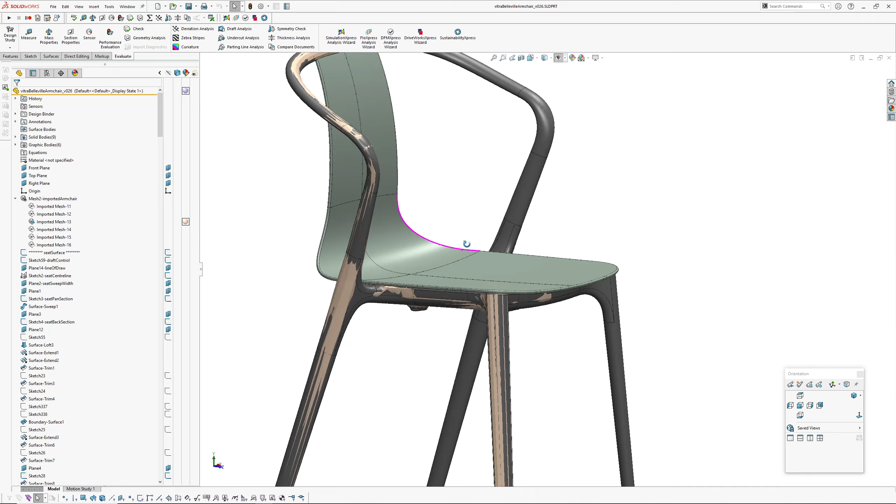As far as references for this, I only had two: one being the CAD model available on the Vitra site or one of their partner sites, which is fairly coarse, and the other reference is the Vitra website. This model looks a bit nicer than the one you can get a mesh for, but you can't download this one unfortunately, and you can't pivot right underneath. It's got some locks there, so this is quite handy for trying to look at the back here.

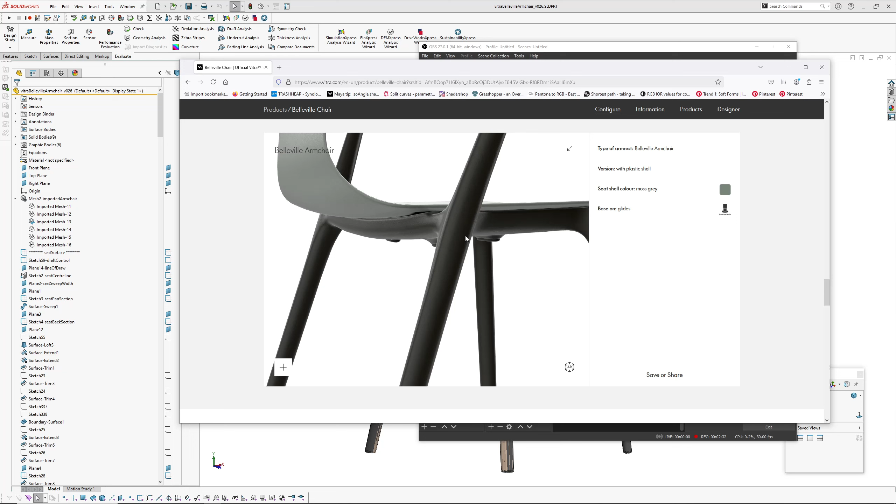So this is my best attempt at creating this chair. I'm going to do what I normally do with something a bit more advanced like this - if we have a look at the performance evaluation, so 427 features, I'll roll through the tree.

If I just show you the directory with the files, you can see here started 2021, then had another go in 2022, then 2023, and then I've really had a run on it since the beginning of this year. As I said, this area at the front where I was struggling, I'll explain that when I get to it.

I'm just going to roll back through the tree. I might take some fairly large jumps past stuff which is fairly like trims, or stuff that's not too critical. I'll upload the file too, like I normally do, so you can download this and pick it apart. Solidworks 2020, so it's a bit more accessible.

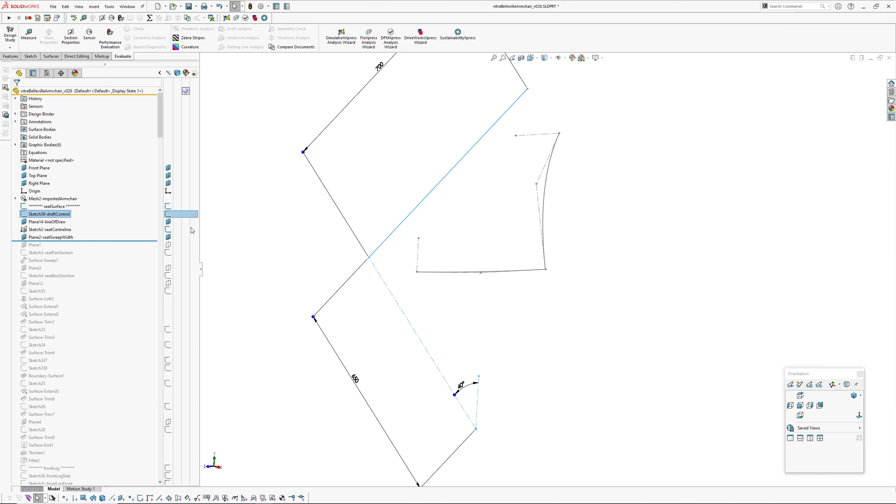First thing was I created this draft control, but I haven't really used much of that. So I'll just bring up the mesh. I trimmed the mesh in half in Rhino.

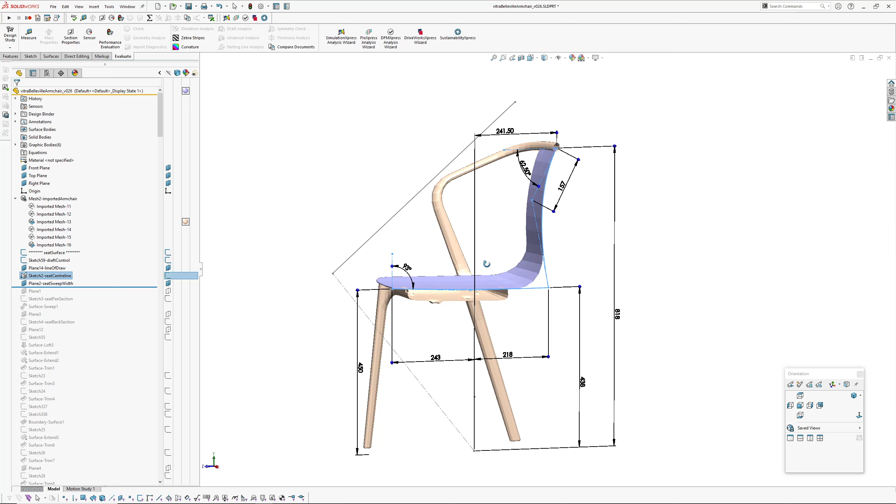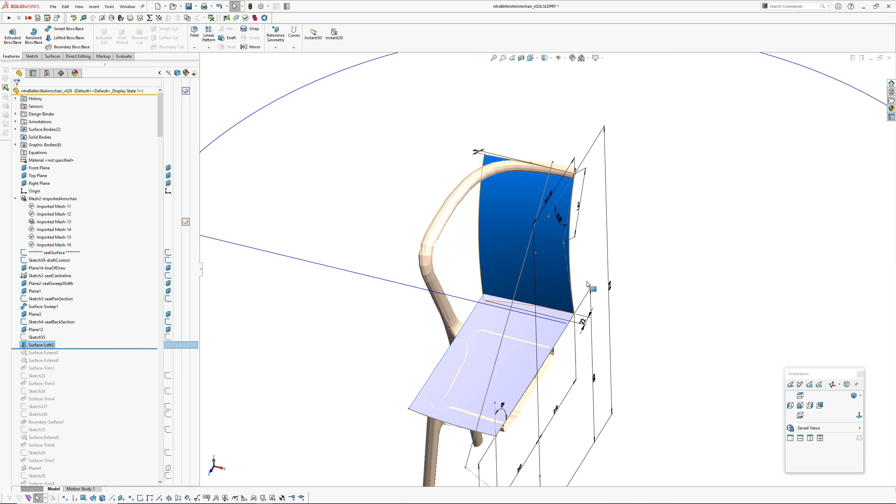I've started by creating the center lines, some sketch geometry, fairly simple degree 2 curves, and then created a sweep, which is that main seat surface on the underside of the seat pan, and then created a back section - the rear section there, this is the loft, because it changes section as it goes up - and then extended those out to intersect on this side and trimmed them back to square that end up.

And then I've proceeded to trim those surfaces back for where I want the bottom area, or the rear of the seat, to run through. And then I've created some curvature continuous degree 5 style splines through there, with 6 CVs, Bezier curves, curvature continuous to the references, and then created a boundary surface.

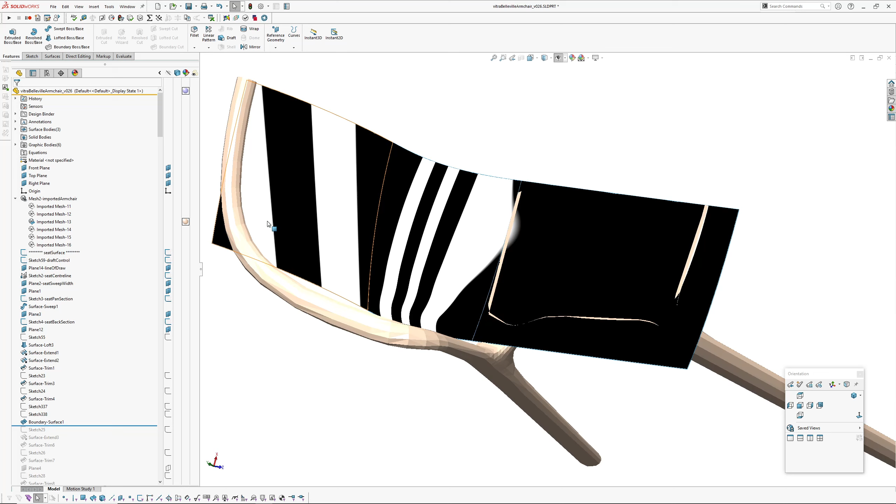So that's the main seat shell construction. It's a bit wobbly out here, but I'm not worried about that because this gets trimmed back. I've overbuilt this surface up here and this one because I'm going to come in and trim this back. That's the back trim, and last of all is trimming through the blend that blends the back and the seat together. I've only made a tangent blend there - I could have made that curvature continuous, but I haven't.

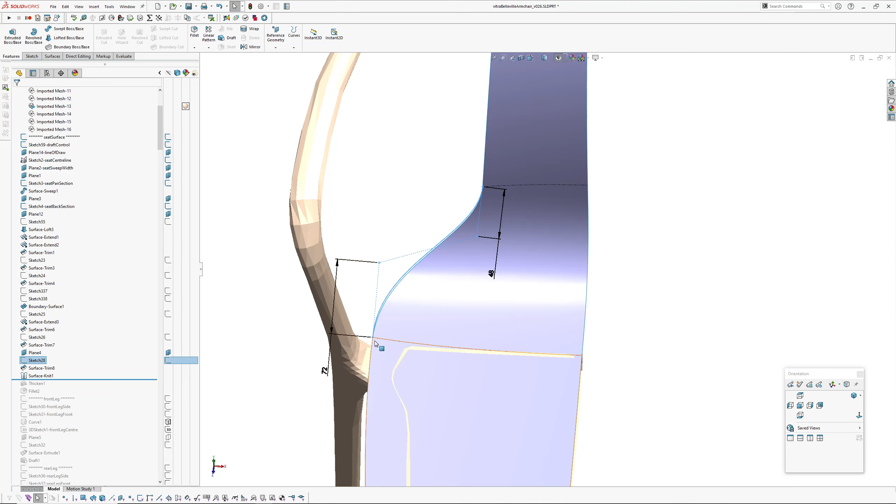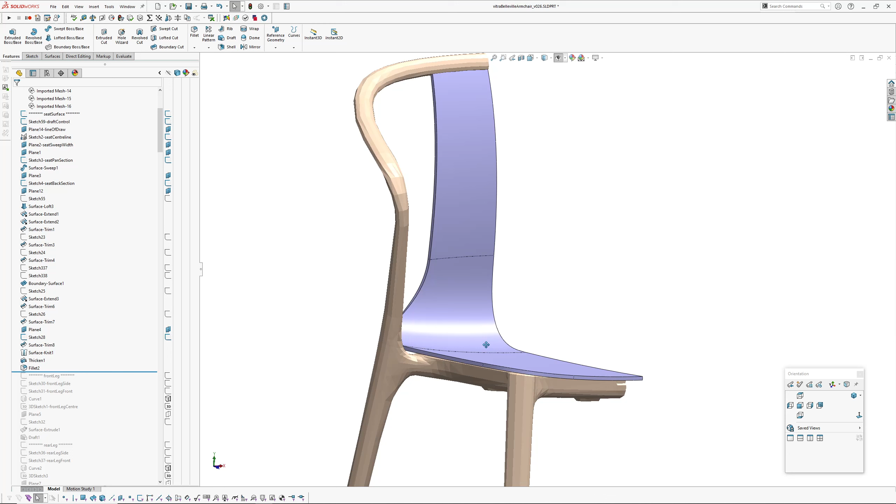So anyway, approximated the form from the mesh, and then I thickened that a nominal amount. Sorry, it keeps hiding - okay, thickened that out, and then put a big fillet on the front. That was easier - overbuilding this and trimming it back rather than explicitly defining this boundary and building surfaces, because otherwise the UV flow on the surface would be narrower here. So instead it's just more open and easier to do, easier to get a nice result.

Next up is the front leg. So with a chair like this, I work the base forms. Any chair I've worked on, actually, the way to try and do it is to get everything in place first, like your base geometry, because that's the stuff that drives the blends, etc.

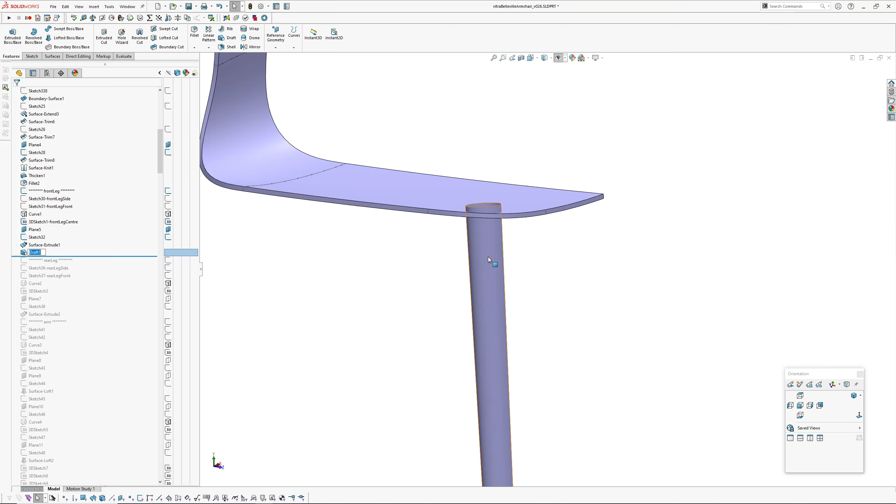If you're designing for manufacture, that allows you to build the base geometry to suit your draft angles, etc. So this leg is an elliptical form, extruded upwards, and I've got some draft on it to give it the taper.

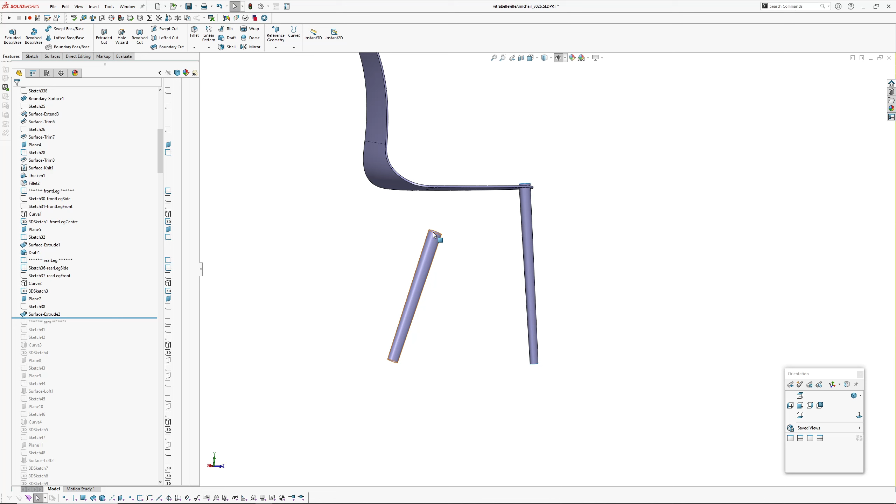It's got half a degree of draft as it runs up. And then the rear leg, I've only run it up to this area here because there's a big blend that goes on, so I just wanted to define that area. The rear leg is a 3D curve controlled with a couple of projections, which are projected onto each other to control the center line for that extrude onto the arm.

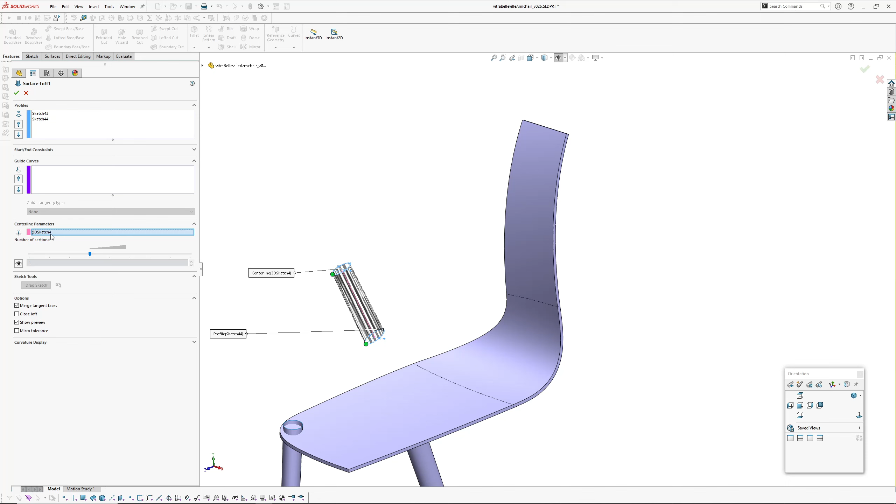3D sketch there. So if we have a look at this one, see if it's center line. It's a center line loft with one section on each end. And then this one up here, again a center line loft with a section on each end.

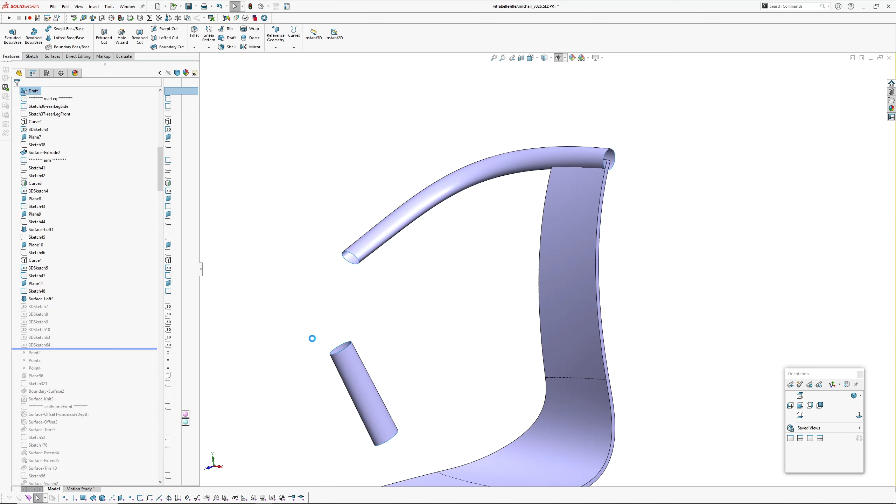So this is where it starts getting a bit trickier, because I had to define a whole pile of geometry here to control this form as it flows in space and rotates, so it didn't pinch, because it was pinching at one point in here. So those are a series of 3D sketches, and those are all dimensions.

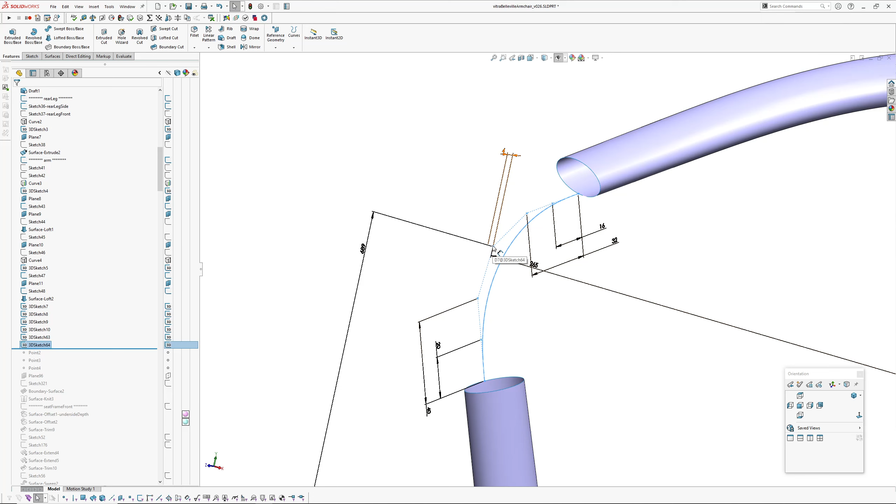Right, moving on, otherwise this video is going to be really long.

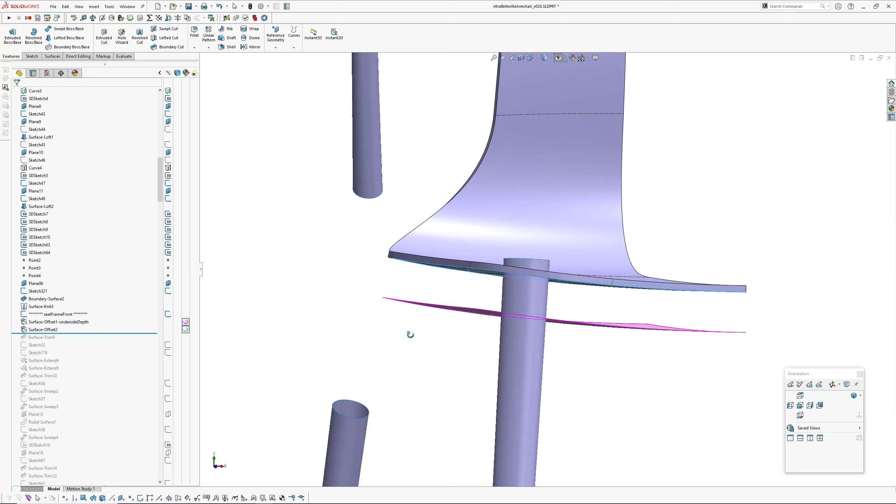Next thing to do was to start populating the seat frame on the underside. So I started building the seat frame front, with some offsets in here. This is the underside, which I decided was going to be an offset. I don't know if it is in reality, if it's an offset of the underside of the seat pan, but I decided to do that anyway. So that's 30.5 millimeters.

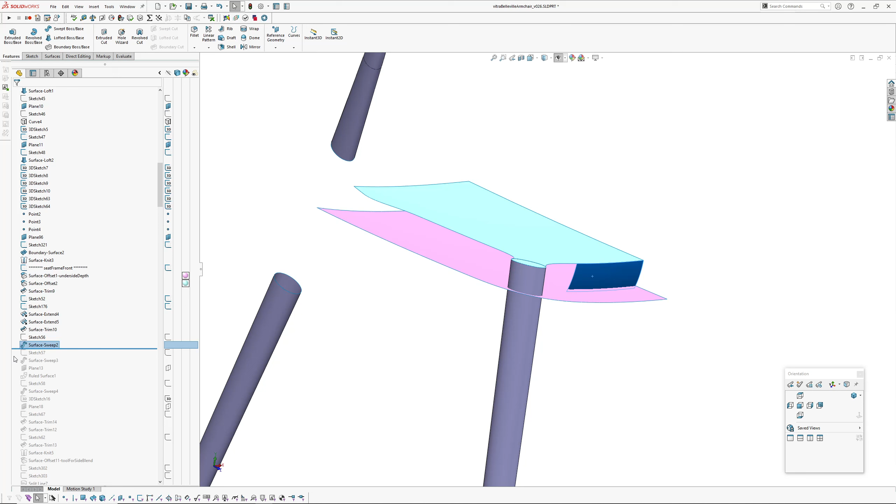And then just a few trims, and we start building, we'll hold the top there, start building the side walls of the under seat structure. Those are sweeps, and they're just intersecting, they're all arc sweeps, swept arcs.

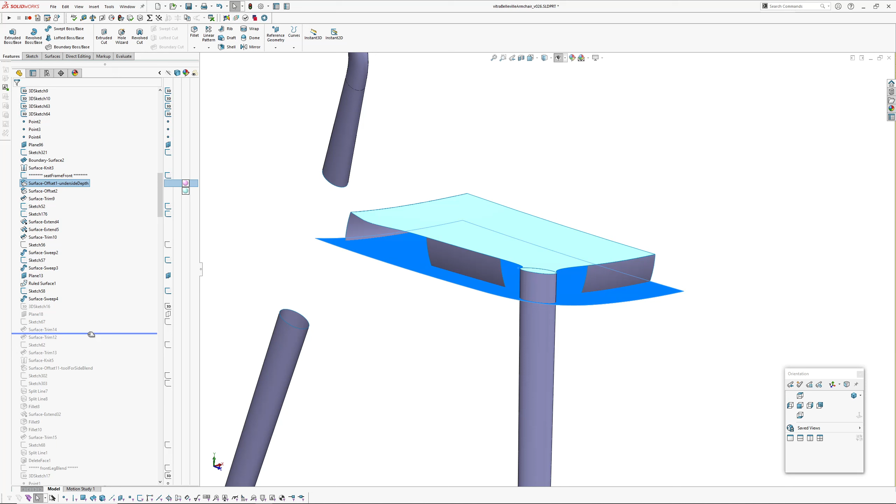And they all intersect through the underside surface, and I've trimmed those back. I've got a few things you might see if you're rolling through the model, like I've got a tool body, which is basically when I've had to copy a surface to extend out to build an overbuilt surface. So anywhere it says a tool body, that's just a copy of a surface, which then gets manipulated to drive other surfaces.

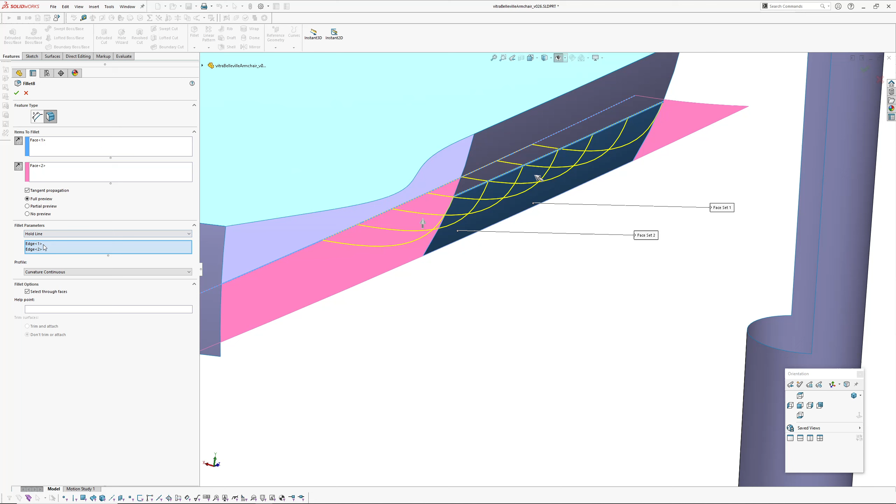So next up I start building some of these side fillets that run around the underside structure. In this case you can see that's not attached. So what I've done there is it's a double hold line curvature continuous fillet.

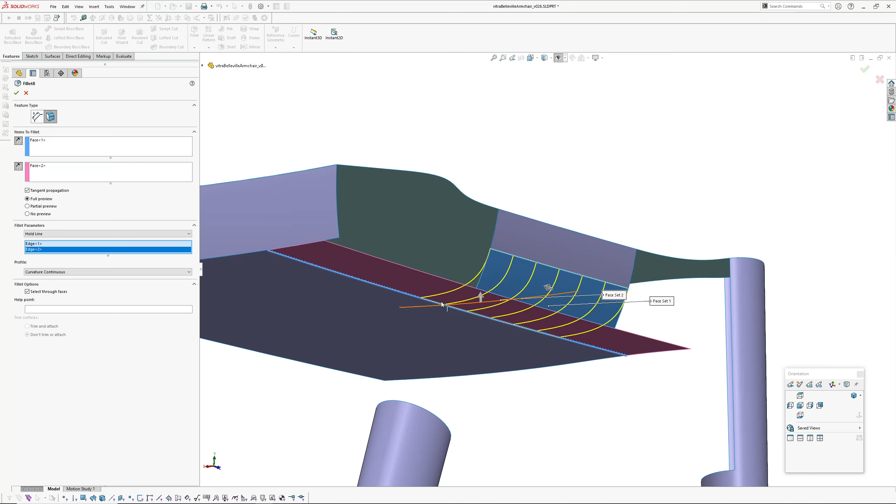I wanted to define these lines here, I wanted the fillet to run from here to here explicitly. So I've defined those lines via split lines by splitting those faces curvature continuous, and then you only get one chance to pick this option, which is in a face fillet. When you create it, you can pick to not trim or attach, which creates it as a separate surface so you can continue to manipulate or extend it without actually trimming back your input geometry. But as I said, you've only got one chance to do that, which is when you create the fillet. You can't go back in and change it once it's made.

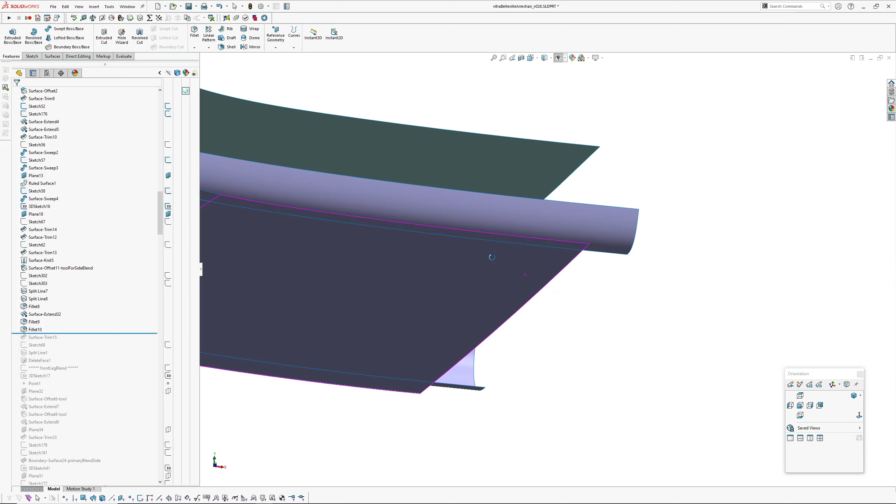And then there's the front and back underside fillets. But in this case, this fillet here and the rear one, they are not hold line fillets. This one's asymmetric, curvature continuous, so I've got two dimensions there. And then I believe the front one is a chord width, the chord width being the distance between the fillet rails.

So those are all unattached, as you can see. Then there's some trims, delete face. And I've cut back a section here from the back of the leg, because this is where the blend's going to start going on. You can sort of see what might be starting to happen here with this, where that ends—it's all going to blend together. So next up, front leg blend.

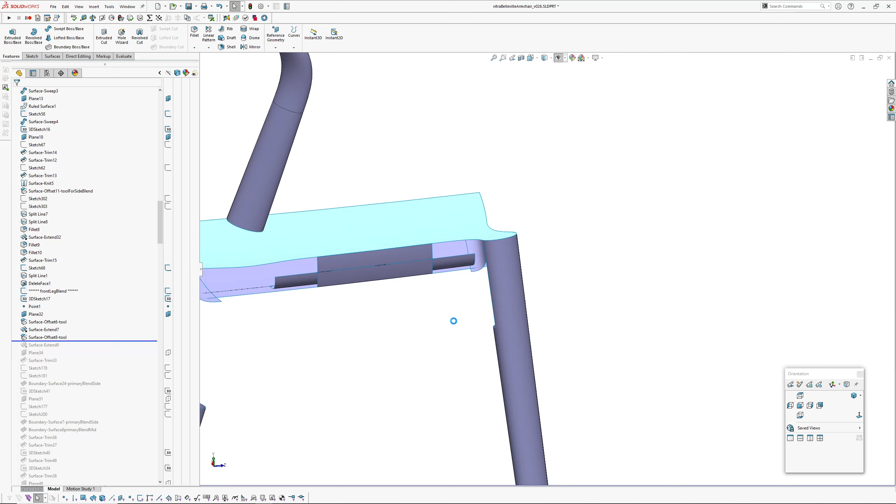Here's some of these tools I mentioned. So I've got an offset surface as a tool, and you can see how big that surface is. So what I'll do is just go down here and we'll show those tool bodies.

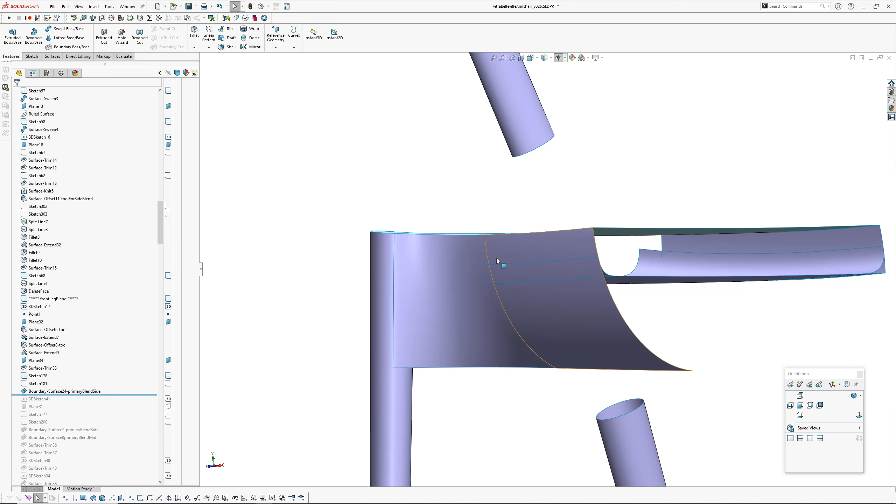I'll show the blend. Originally I'd been trying to build this surface in here, just running it to the same height as where that fillet terminates, across here in this model. I was trying to build the surface here, then block in surfaces through this area, and I was having continuity issues and general flow problems. This is the area that stopped me working on this each year, until I sat back and had another think about how to do it.

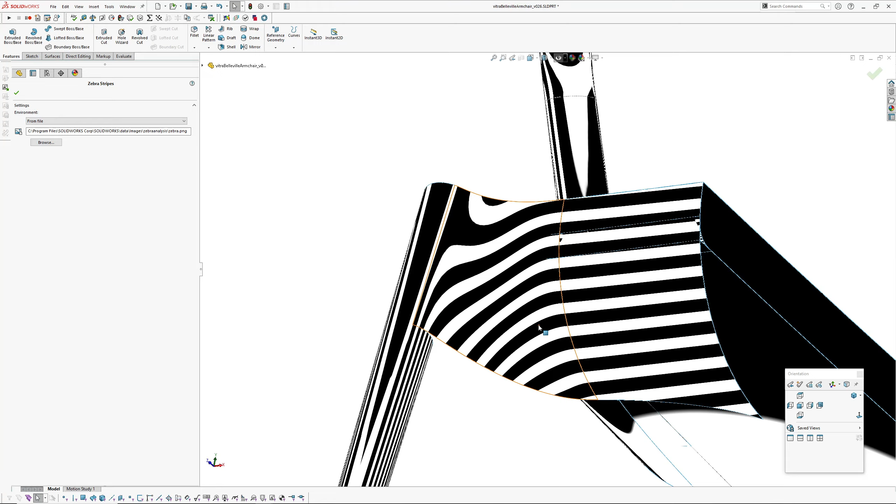So we'll jump back to the other model. As you can see here, I've got a big overbuilt surface, and the theory is we are going to trim this out. I know I've made this massive surface and I've got a tool here, but if I turn on zebra stripes, I've got a really nice flow all the way through here and into the leg. So I don't have to worry about patching things, or how I'm going to terminate a pointy 3-sided surface or 3-sided hole. This is a much more robust way to do it, and I'm doing the same over this side.

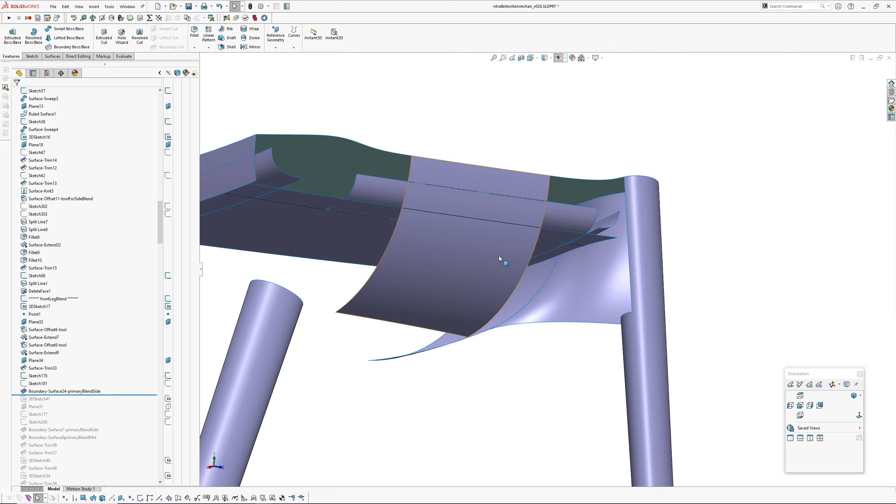So I'll just roll forward. That's the other side blend, so I've got the 2 side blends in place. I'll just hide these tools now.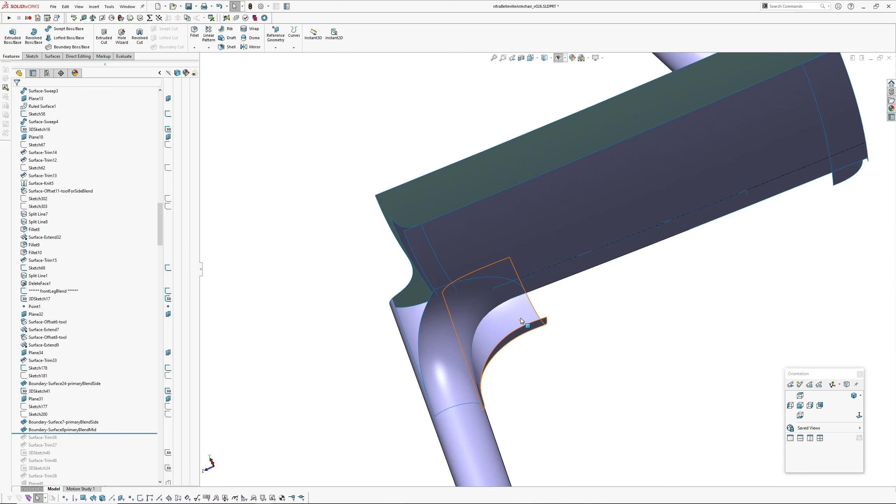Next up is another surface I have to create at the back, called the mid surface. I'll hide these blends as well. As you can see there with the mid surface, it's running from the underside structure, and again this is a large surface which will be trimmed back. I've overbuilt it just so I can trim it back how I want, and I know it's curvature continuous spanning between the leg and the underside of the seat structure.

Next up I'm just going to trim these back roughly with each other, so I can see where the theoretical edge intersections are, just to help me when I'm sketching out the blends, or the trims for the blends. Just doing some stuff here to trim back the fillets.

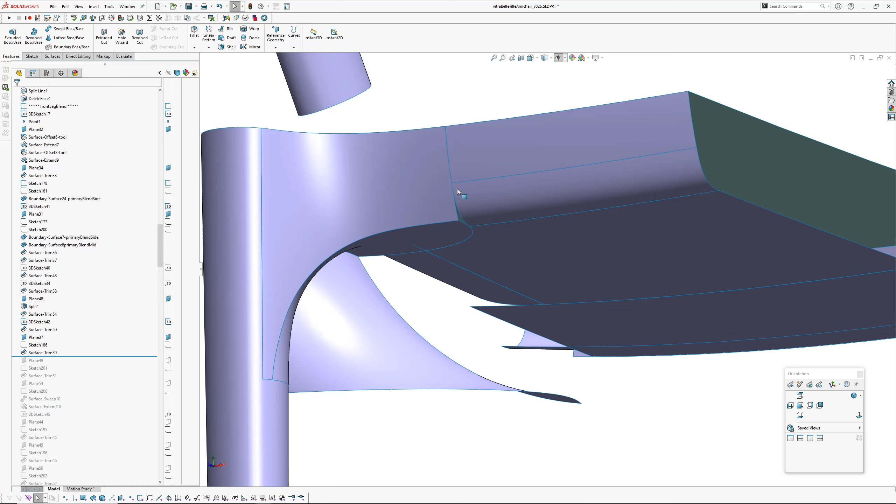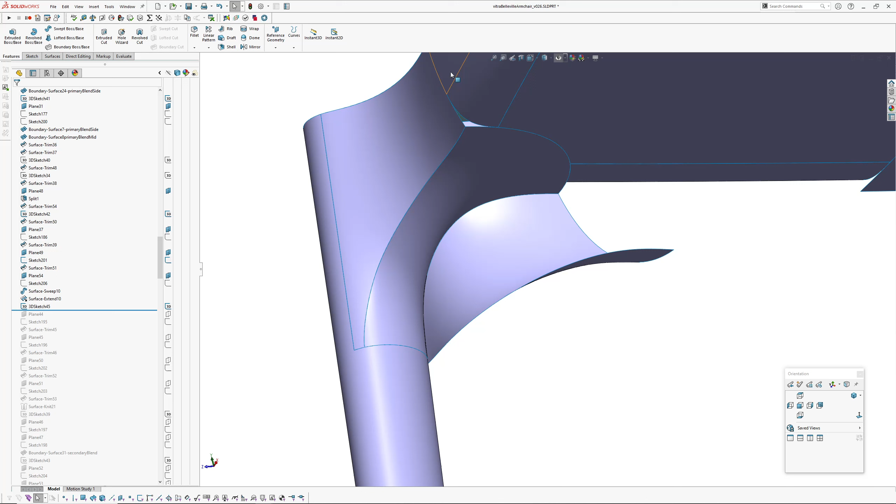Okay, now we're going to start. I've got a sweep down here which gives me some geometry to try and run some trims onto these, because now I've built these, I know this is all smooth through here and through here, but I've got to transition this fillet down into this area. So I have to trim these primary surfaces back to give me my secondary surfaces.

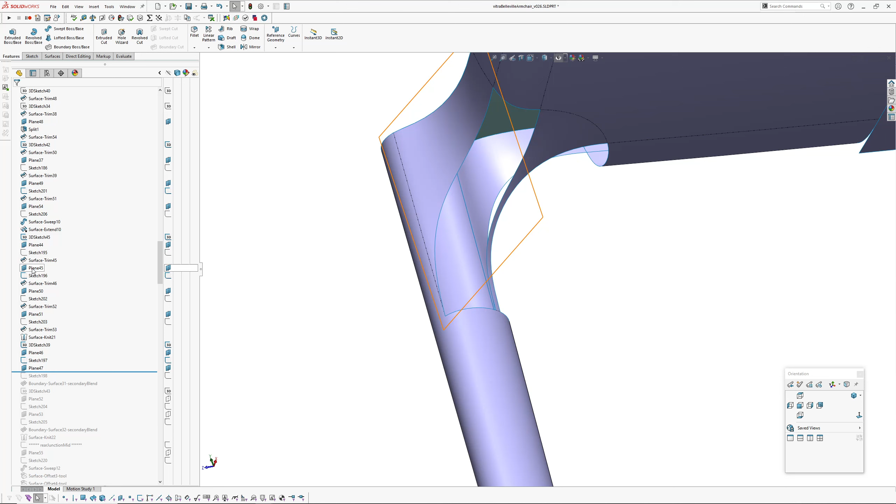So if I jump forward here, you can see I've trimmed those right back, and there's various bits of geometry in there that control my trims. I've got a sweep running down here which gives me a nice constant offset, and then sketches and planes at funny angles, because you want to trim from a suitable angle so you can get a nice tangent on each end.

This end here, big thing - if this was 90 degrees, then this edge here would run tangent into that, which means you run into the problem of that edge potentially disappearing. It might not, but even if it doesn't, Solidworks doesn't like it, and you can end up with crinkles. So if you're doing something like this overbuilt surface, don't take that down to zero, to being tangent with the other edge. That trim is 91 degrees, about 1 degree of difference at the end - I only found that out through crinkles on my surfaces.

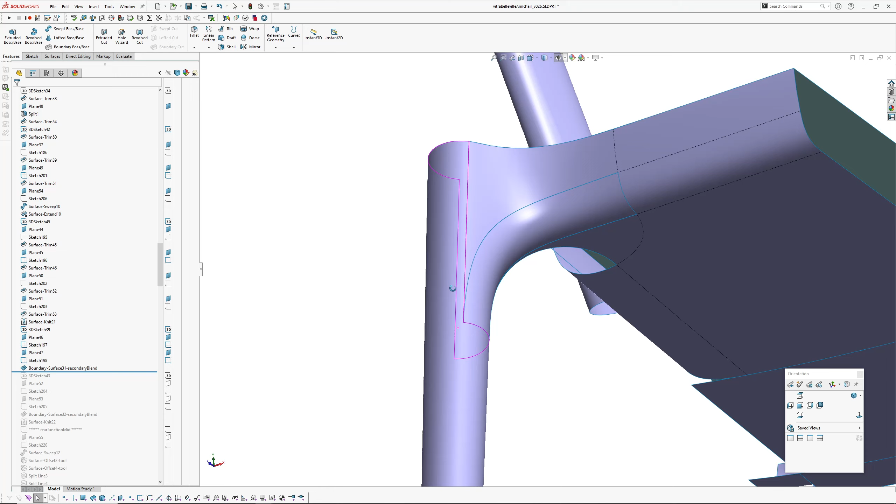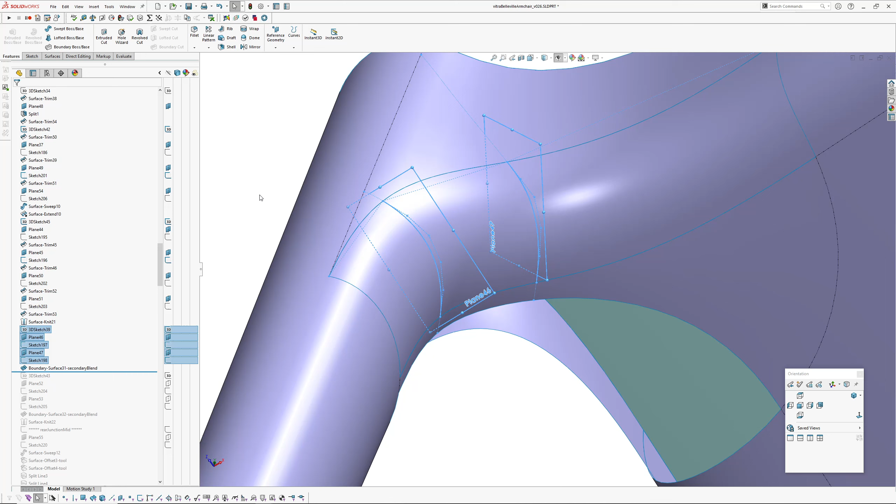Okay, so then I've got these blends - these are big, what I call secondary blends. I have a series of a 3D sketch which controls planes and some cross curves. These cross curves are all degree 5 style splines with 6 CVs, curvature continuous at each end to intersection curves through these surfaces. That's the same across all the secondary blends right across the model, including at the back, and that's a boundary surface.

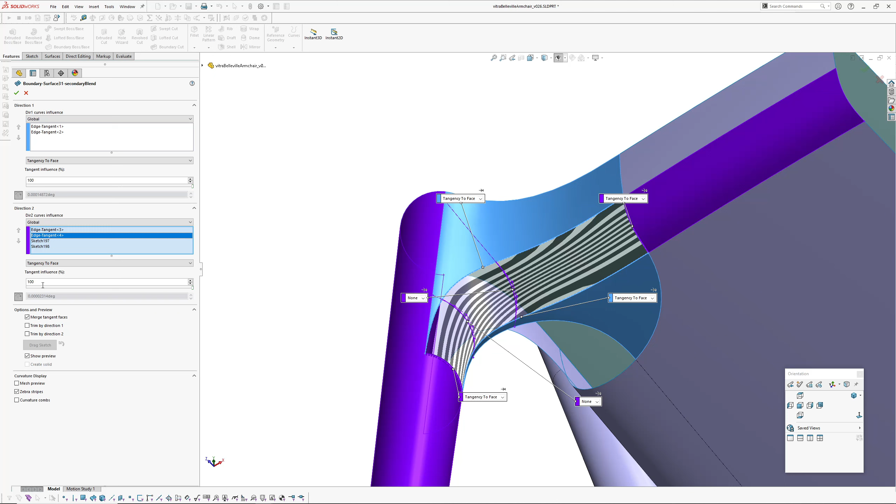So the boundary surface is tangent to the main, the long axis, 100% tangent influence, and then we're tangent at each end here as well, also at 100% tangent influence. Then I've got my second blend on the other side, constructed in the same way. It's a little different because this side fillet has a bias in its size, as you can see.

So end result - it's a bit coarse in here. This is just the zebra in Solidworks. If you think the zebra looks a bit coarse here in Solidworks, I'll put this all over into Rhino at the end so you can have another look.

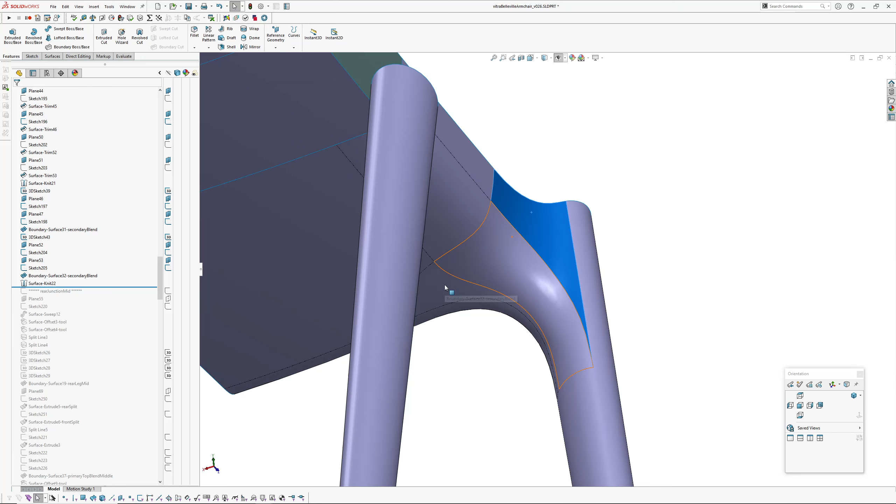So there's those blends at the front there. So that's the front leg completed. Just big overbuilt surfaces basically was the way forward.

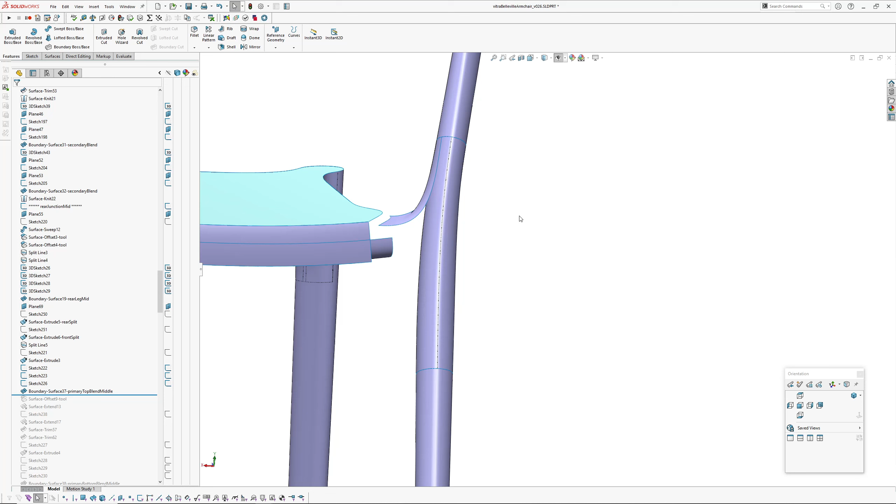Now the back is an extra level of tricky, because we've got this section through here which has to blend into the underseat structure. So this area here, we're building the rear junction mid, building the surface here, and then deciding where to split the surface, because we're going to delete this part here, since we're going to run curvature continuous surfaces from here through to here. I've got controls in there to control where this point goes, because if you move this a little bit, anything that runs curvature continuous surface off there has quite a great effect on it. So it's needed for fine tuning to have control over that line on the front and back of the rear leg.

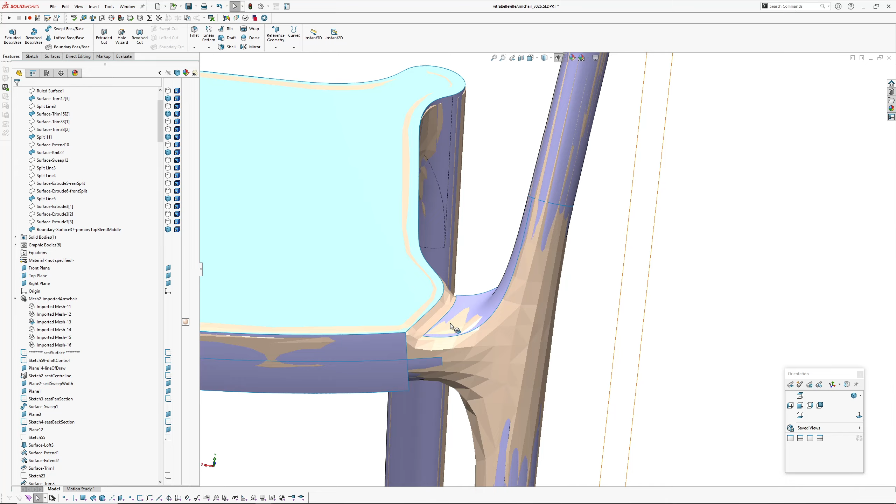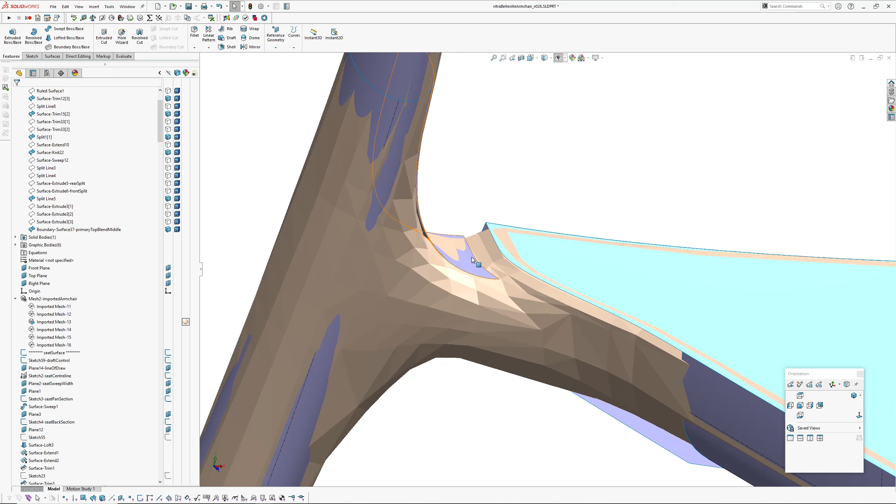Okay, so I've started building my overbuilt surfaces, as you can see. The back here, if we turn on the reference mesh, it's quite complicated. Just blur your eyes a bit, squint, and you can get the general feel for this. So this is running underneath the surface here, and by the time it gets around to here, it's running the other direction. So this surface here has to come around and then lift up to meet up with this edge here, while also blending between this face here and this face here, and the same on the back, while also addressing how these fillets run in. So quite complicated.

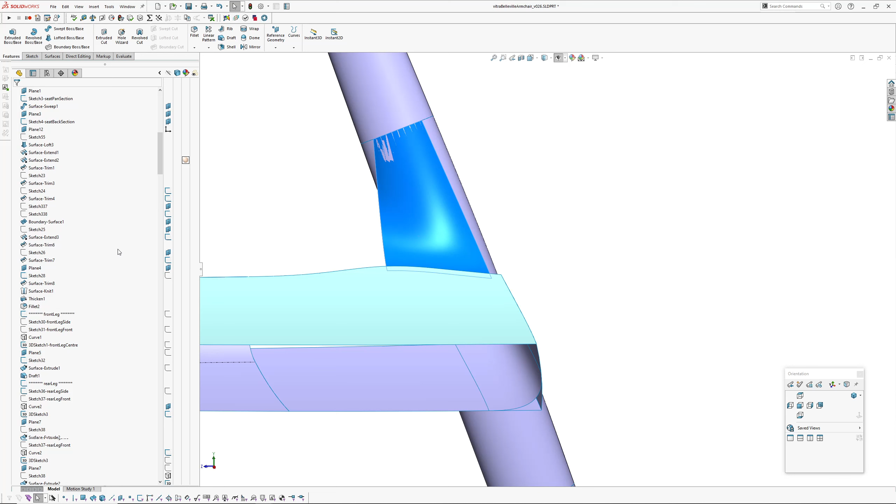So this time I've created something a bit—how would you call it—instead of making planes, I've just created these extrudes, which I can control from a sketch here. So I can control where these surfaces, which are used as planes to sketch on, lie, and then I've created sketches on those surfaces. It was just a simpler way to set this up rather than having lots of planes and stuff like that.

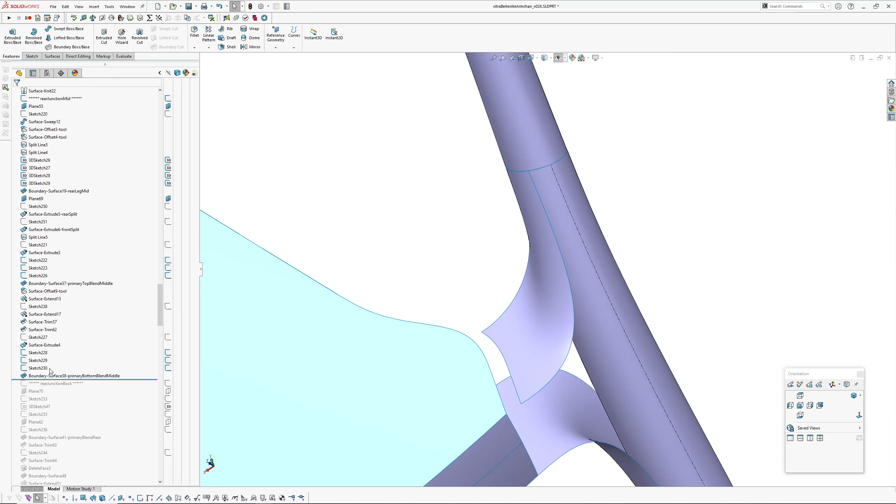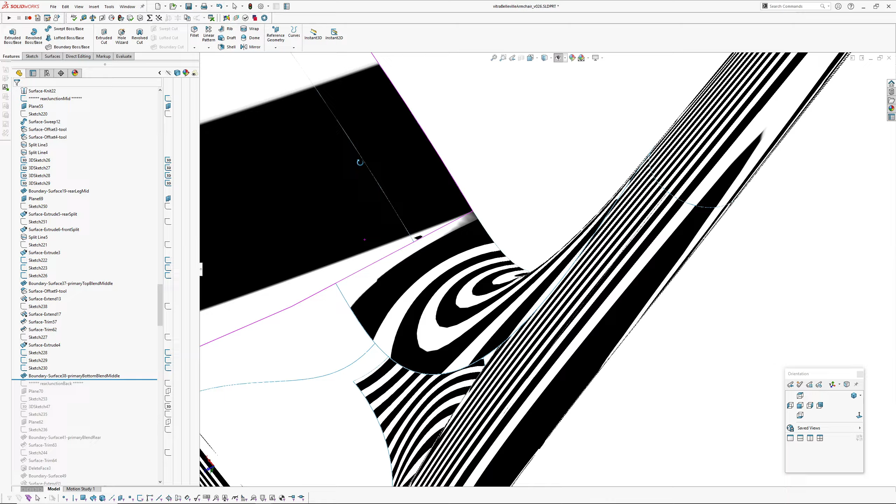And then those sketches control this overbuilt surface here. And then we've got some more creating tools for overbuilt surfaces again. For this surface down here, I have got this—where are we? I know that's for later. Anyway, I've created this bottom surface in the same manner as the top one, and if we put our zebra stripes on, you can see what's going on there. So it's blending out of the leg, running around and into the underseat structure, and on the top it's just running around to being horizontal at that point.

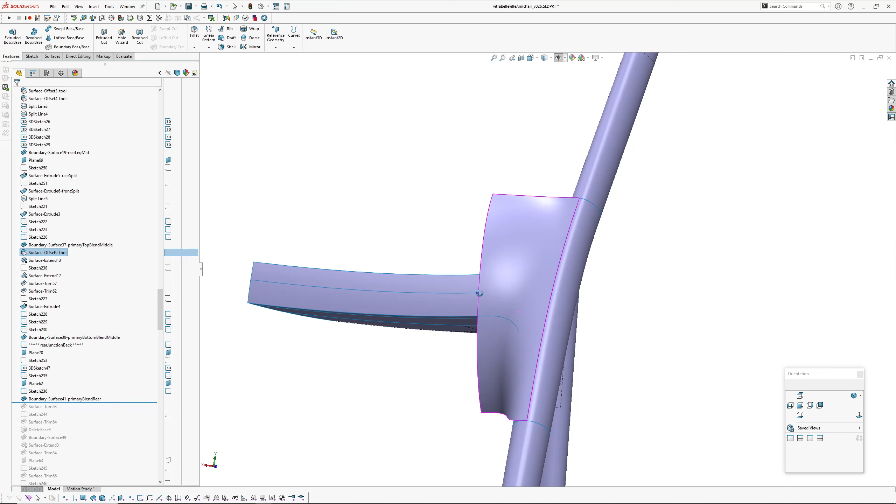Okay, next is the rear junction back. Again, massive big overbuilt surface. The tool for that is up here. Pretty much the same as the front. I've spanned between that tool body and the surface here with a giant surface, and that has 3 sections controlling it, the most critical being through here in the middle. End result, so running fairly smoothly out of the back face of the underseat structure.

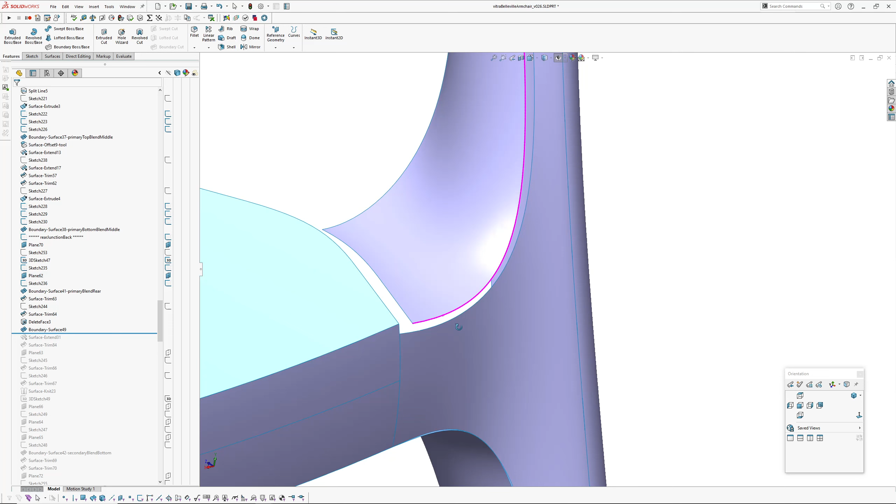Okay, next up is trimming that back. So I've trimmed that back to give me a rough idea of where the theoretical edge of these two surfaces are, where the intersection is, but because they don't actually intersect in a nice manner, I've just trimmed them sort of arbitrarily. So I've got a rough visual reference to know how far back to trim things, or the curvature of the trim, to get a nice blend that isn't biased heavily to one side.

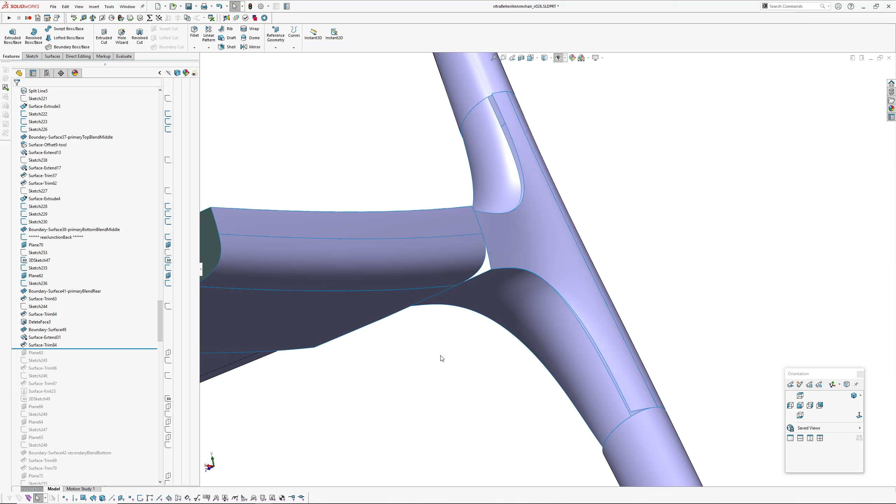Okay, so trim back to expose that fillet, and then a whole lot of other trims like that, if you want to have a look at those. So again, sketches, sometimes on arbitrary planes, other times not, and again it's all dimensioned. And like the front sections, this is a boundary surface with some cross sections in the long axis to give me a nice flow.

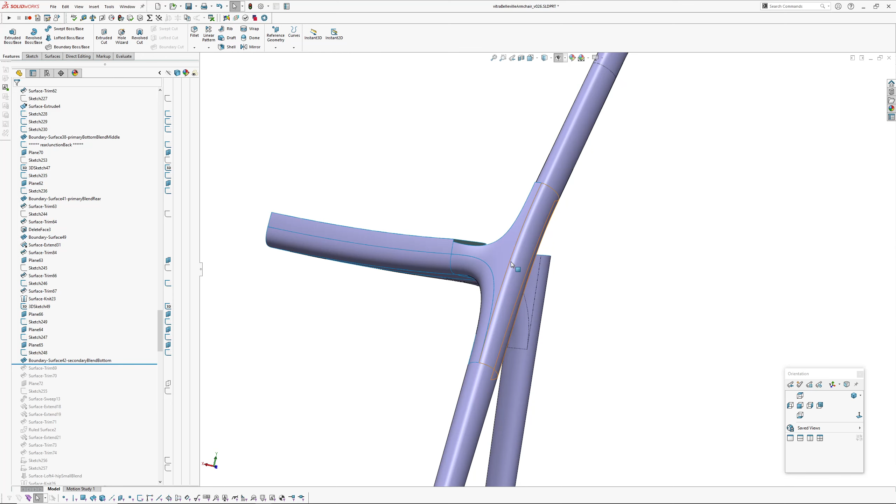Like that. So this is a tricky area on the actual product. If you look at it, you can see the highlight that runs down the back of the leg. It carries on fairly uninterrupted through this area. So that means this surface almost runs around, and there is a bit of negative curvature on this face here, as you can see. Okay, so that's the back blend there, and then it's onto making this little surface up here.

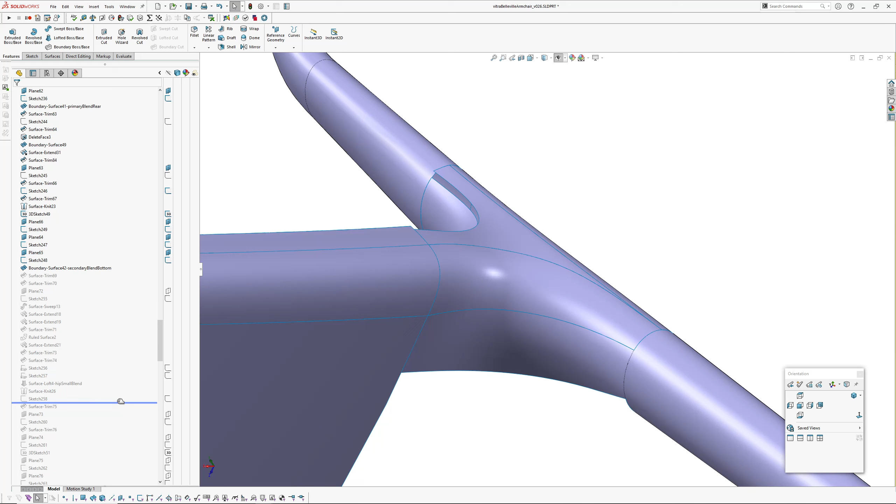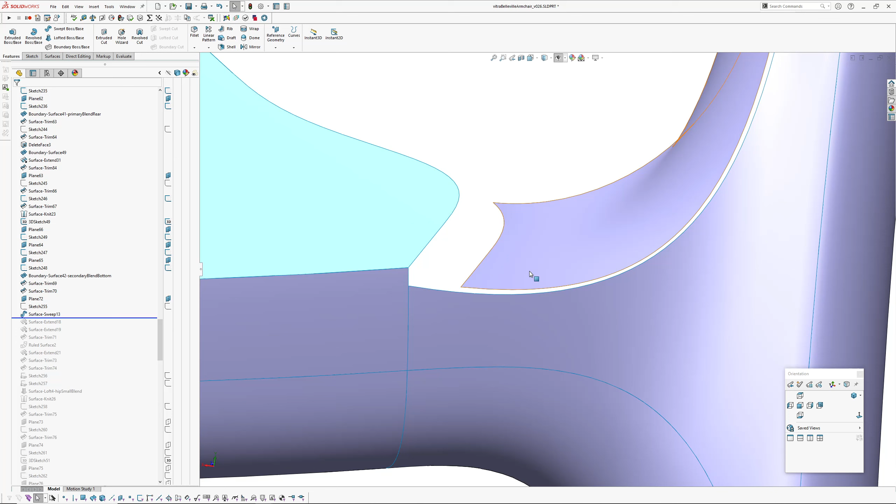So it's called the hip small blend, and that is basically got a rolled surface here which is taking tangency off another surface, and then a sweep to trim back this edge here. Hang on, let's have a look. Okay, so that sweep gives us a nice equal distance, like if that's the rail and the sweep is touching over here, it gives us a nice equal setback for the blend.

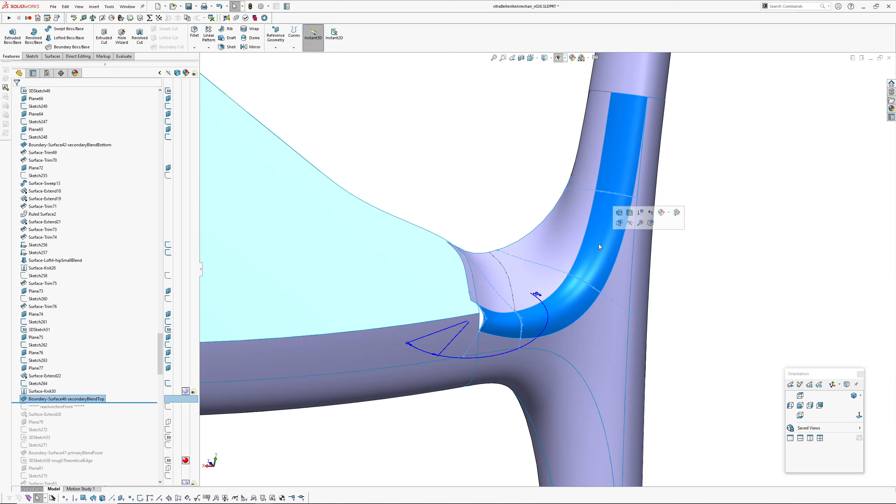And then down here we have the top blend, the secondary blend. This one's a bit trickier because it comes down and hooks up under the seat pan. If we look at our reference, you can see it comes down, around, and hooks up under the seat pan. So again, that surface has multiple sections controlling it, as you can see there.

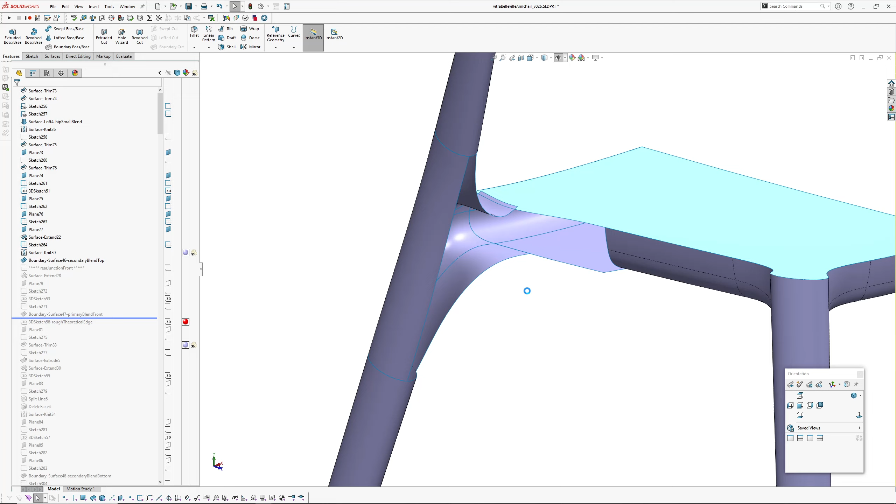Right, so that's the rear of the rear leg blended in. Now it's the front bit, which has got its own sort of tricky areas. So first up, let's create a giant primary blend there from the surface to the outside of the leg. Again, nice big sort of open flowing surface.

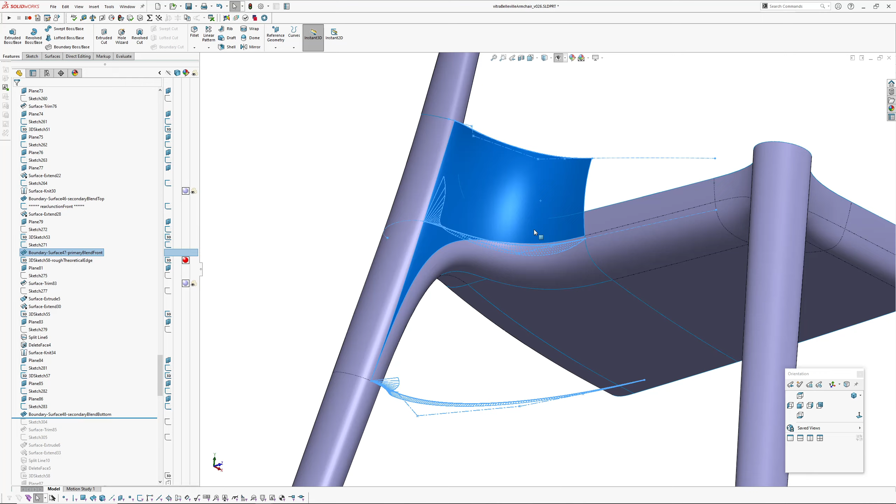And secondary blend at the bottom, so that gets trimmed back. We've already got our underside primary blend there, which has been trimmed back. So now we just trimmed everything back and put this big surface in here. That was a little bit tricky at first. I didn't know where to terminate this area here, but it all sort of worked out.

Okay, so again, this is built pretty much like the front under here, except a little bit more complexity, and several cross sections across that blend to control the fullness of it.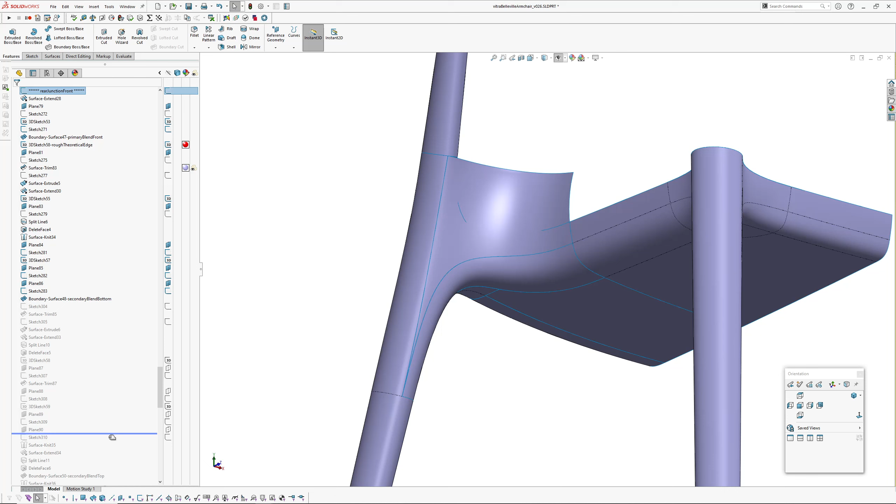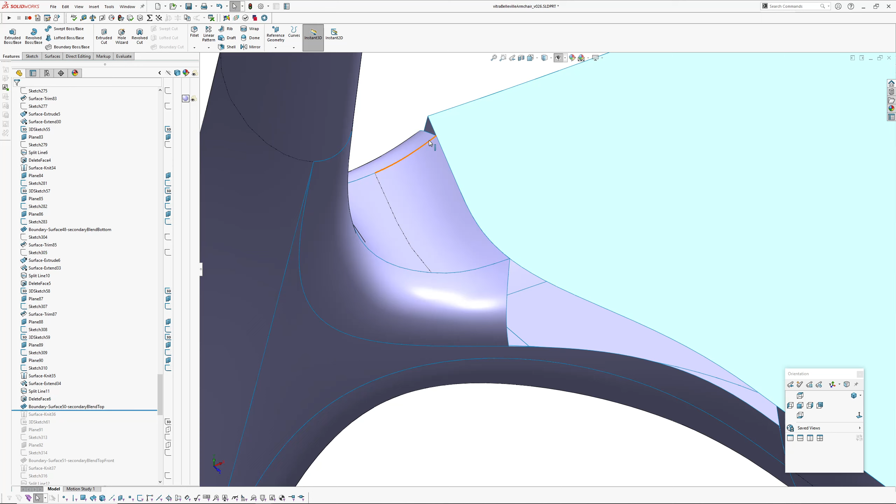Right, and now the top blend. This is where I sort of also got a little bit stumped, because the surface goes from being undercut to being the opposite direction. I was not entirely sure how to do this at first, but I thought, okay, let's just break it up, kind of like I broke up the back surface here. Build this surface here, and then we can just finish this area off separately.

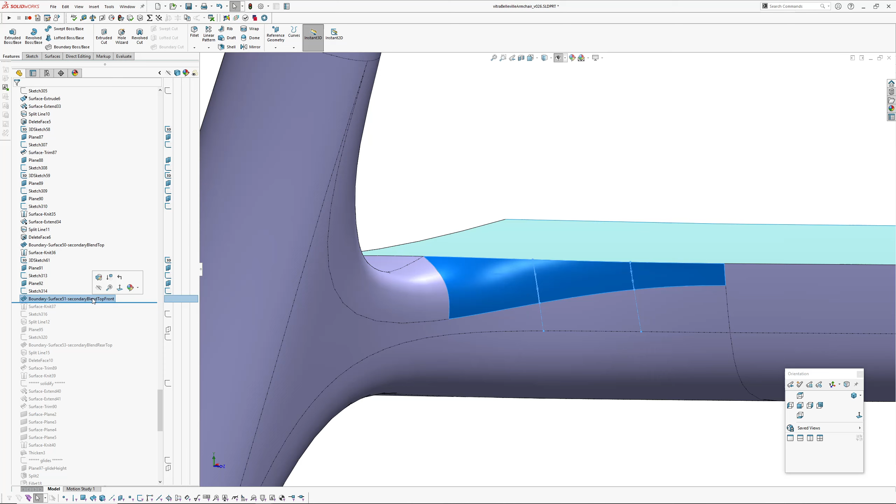So again, this surface is treated in the same way as all the others. Knitted that all together and created this secondary blend at the front, with a few cross sections that are curvature continuous to the surface, to finish it off. So that means the surface, you know, we get to transition, it twists as it goes along here, from undercut to over.

And then last but not least was finishing off or extending this surface out here. Just cap that off, even though there's a fillet that runs around here, sort of erodes most of that surface back.

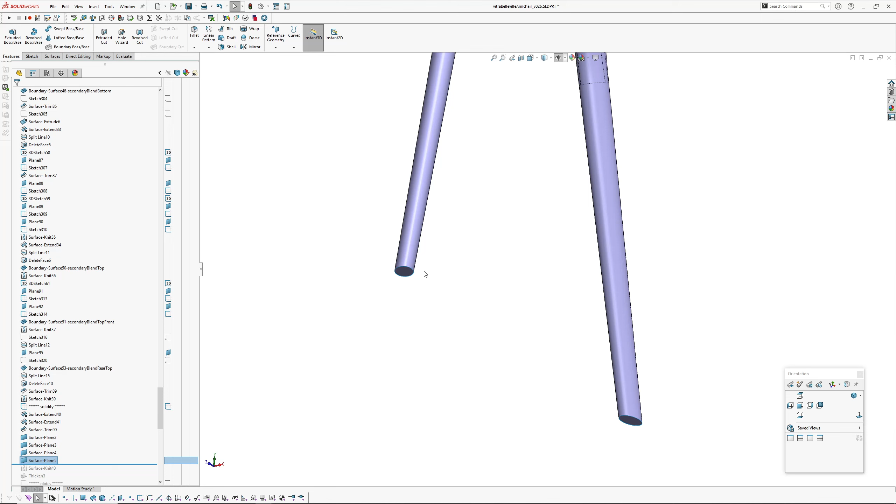Like that. Okay, so next it was on to just some basic functions. Solidify, so create planar surfaces wherever there's holes on the center line. Extend the legs down to the floor plane and trim them back, and knit everything together and thicken it to give us a solid seat frame.

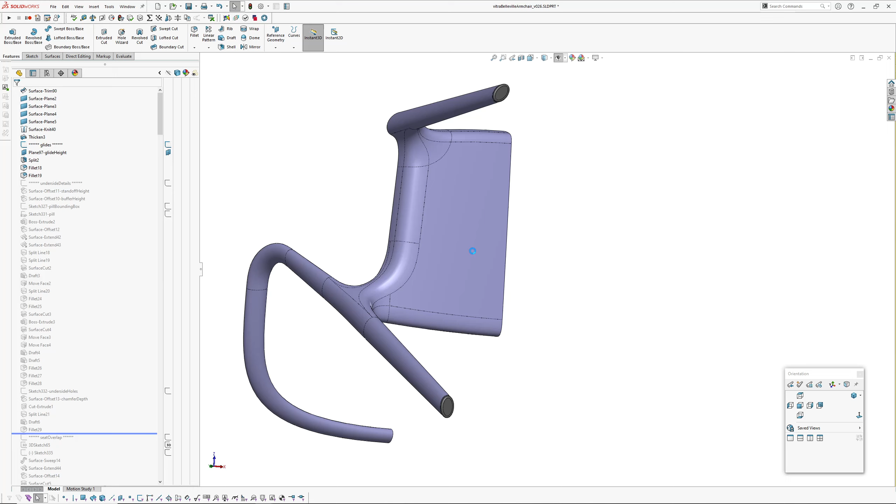And create the glides, which is splitting those bodies apart, putting a fillet on it, and I thought I'd add these underside details too because they're quite prominent. Because they're a lozenge form I got to use my Clothoid Apple Watch 6 button setup. So that's that, that's the underside.

And last thing was the seat. The top of the seat pan actually overlaps into the back of the frame, so I created a cutout for that, with a little offset gap there. And added fillets.

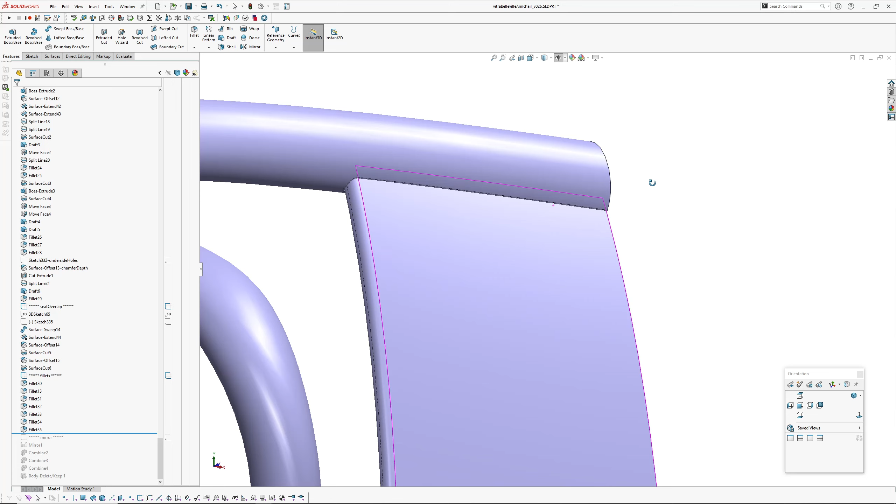And mirrored everything across. Combined the bodies that need to be combined and ran a body delete-keep at the end just to keep our solid bodies. So there's the end result - that's the Belleville Armchair from Vitra.

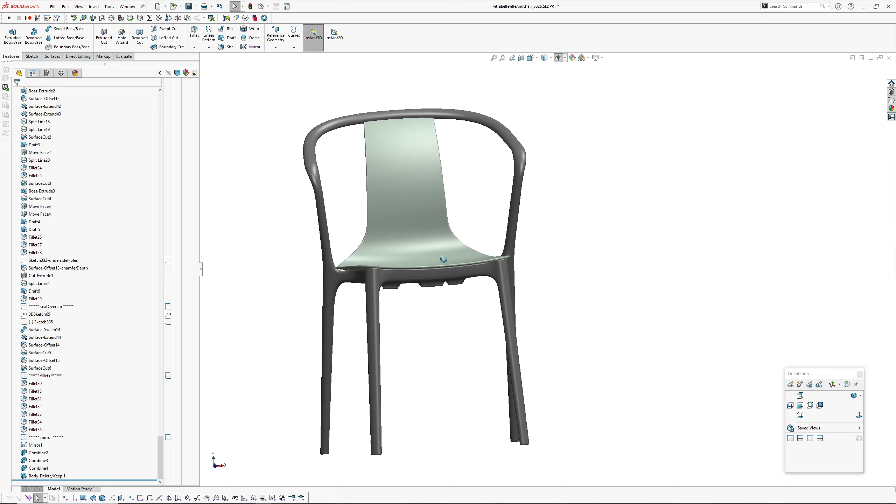I'll take this over to Rhino so we can run a zebra analysis on it with a finer mesh so we don't have as many jaggies. Okay, so here we are in Rhino. I'm just going to change the default mesh. Okay, so this mesh is a bit finer.

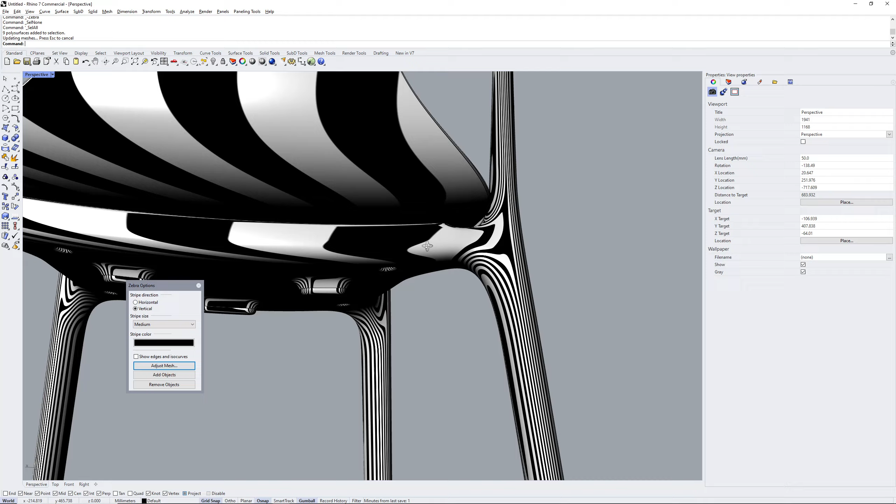So the seat pan, that's all good, zebra on there. I know the arm looks a bit funny through here, looks a bit sort of flat. But I've done quite a bit of comparisons with the photos and their model as well, and that's kind of what happened. So it is what it is.

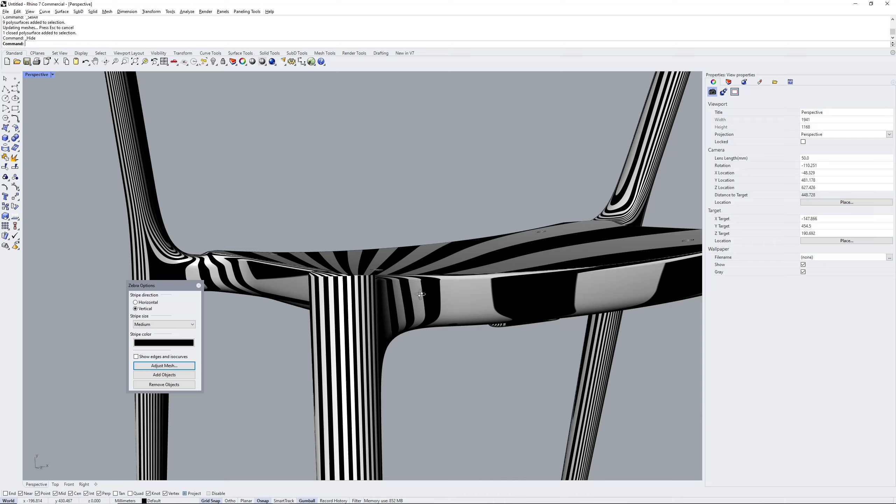The blends on the underside - there's a few little glitches here and there when you look at it with a super fine mesh, like through here there's a little crease, but way better than my first attempt, which was as I showed you. Remembering this chair, like most chairs, have fairly heavy textures on them, so little wiggles and wobbles probably - oh there's one - probably aren't the end of the world. In fact, I know they're not the end of the world because I've worked on several chairs that have gone to production, so it doesn't really matter if there's a slight discontinuity.

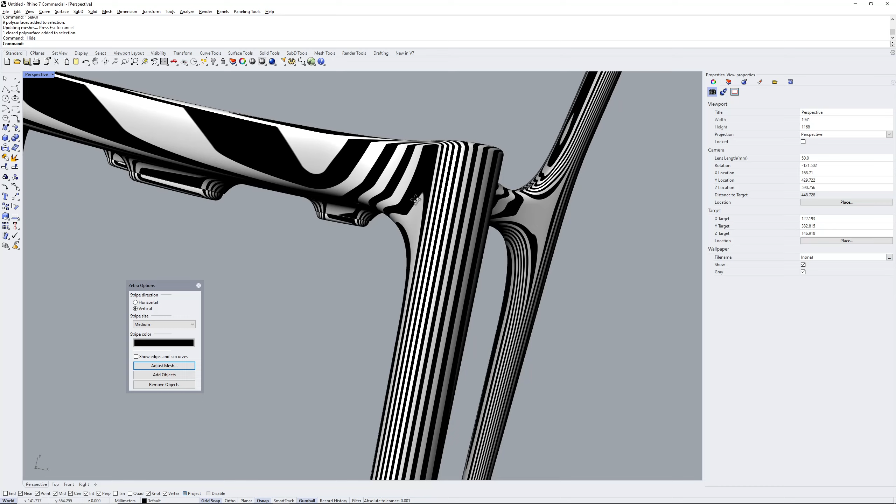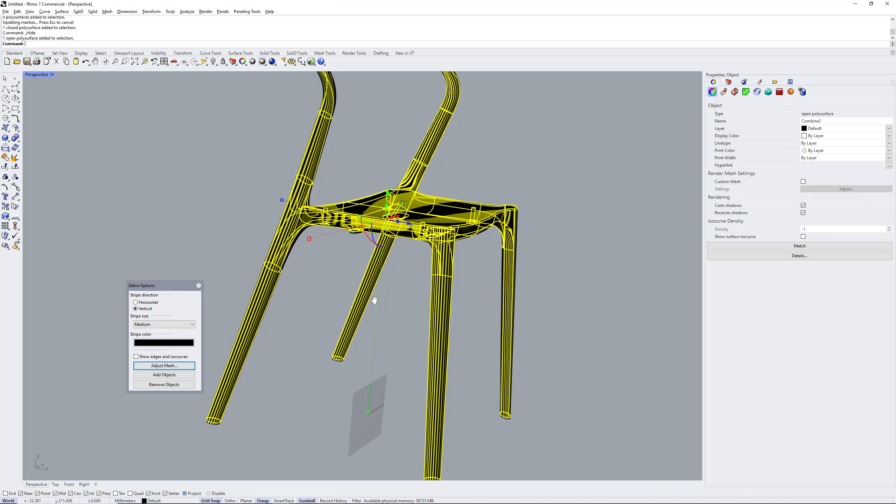It's more about the general gross flow of the surfaces, and I'm guessing these frames are probably molded with gas assist so they don't core out down inside the leg. There'll be some sort of void created in there via a gas process. So anyway, all looks okay.

Nice shiny environment map, which kind of hides a lot of, you know - this is more like if it's got a sort of coarse texture on it, more representative.

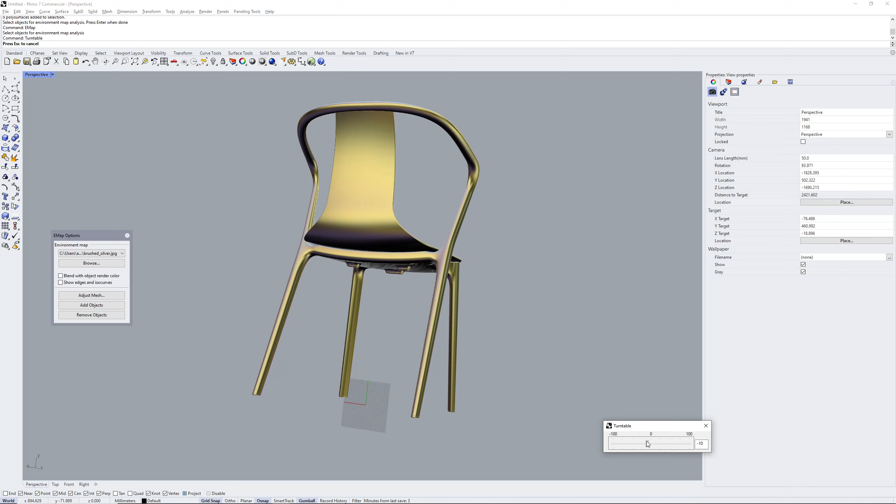Sure, there's probably other ways I could have, instead of making giant blends, overbuilt surfaces, other ways to do it, but it definitely got me out of a sort of sticky spot, especially around the front here.